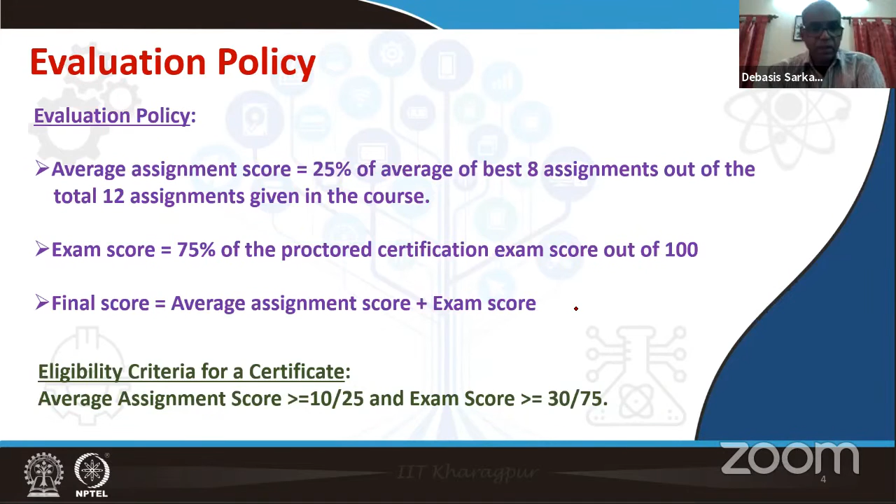Now, let's briefly talk about the effect of recycle. We first talked about recycle when we discussed conceptual process synthesis in the context of design of the reactor and its recycle stream. Then we discussed separation systems, and how the reactor and recycle stream influence the design of the separation process. We have seen that one of the most important uses of the recycle stream is to suppress the production of undesirable byproducts. Minimizing the amount of toxic and dangerous undesirable components has become increasingly important with tighter pollution and safety standards. So the recycle stream is very important. All unreacted reactants will be recycled back to the reactor. This will add to your process economics.

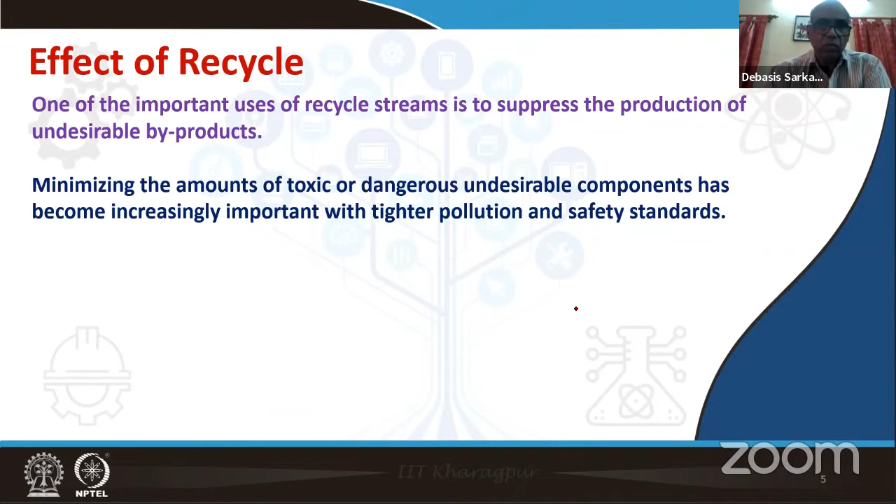Now, one of the basic issues with recycle streams is that they can produce a drastic slowdown in the dynamic response of the entire integrated plant. What it means is that a process without a recycle stream and a process with a recycle stream will show completely different dynamic responses. A process with a recycle stream will be much slower in dynamic response.

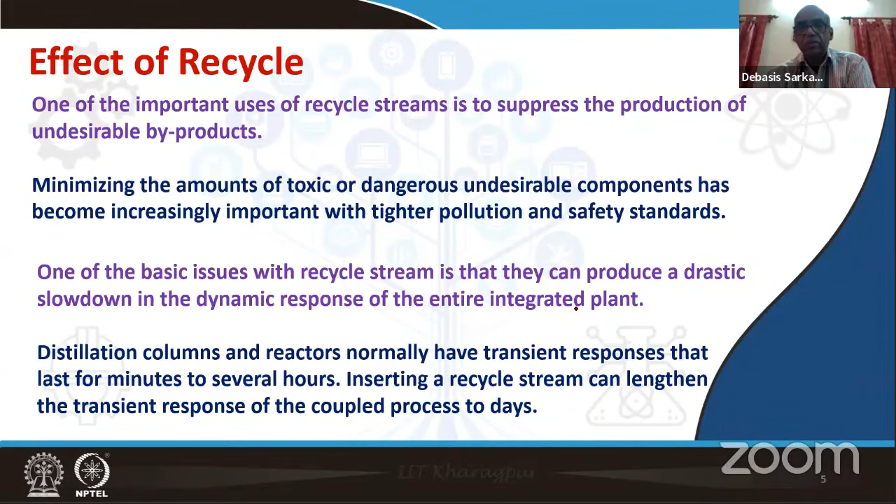For example, distillation columns and reactors normally have a transient response that may be of the order of tens of minutes to a few hours. But when you insert a recycle stream, the transient response of the coupled process may be in terms of days. So this is how it slows down the process dynamics. The response becomes very, very sluggish. Now, let us see why this happens.

Let's consider a very general process block diagram. You are familiar with this block diagram; you have learned it in your process control class. So we have a forward process, and then there is a recycle stream. The input to the forward process is basically the sum of the input that goes here as U and the input that comes from the recycle process. That's basically the output of the recycle process.

Now, what we can do is, we can consider the dynamics of this forward process. We can also consider the dynamics of the recycle process, and then find out the dynamics of this integrated process. So this is the simplest possible case.

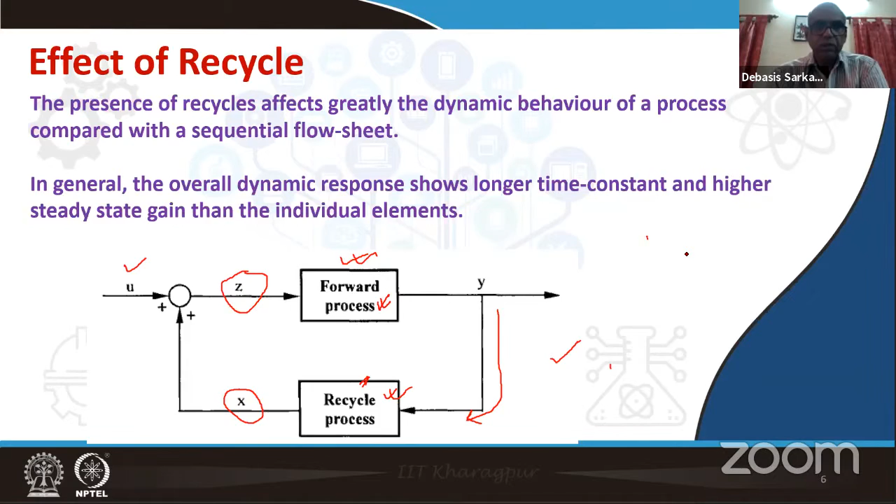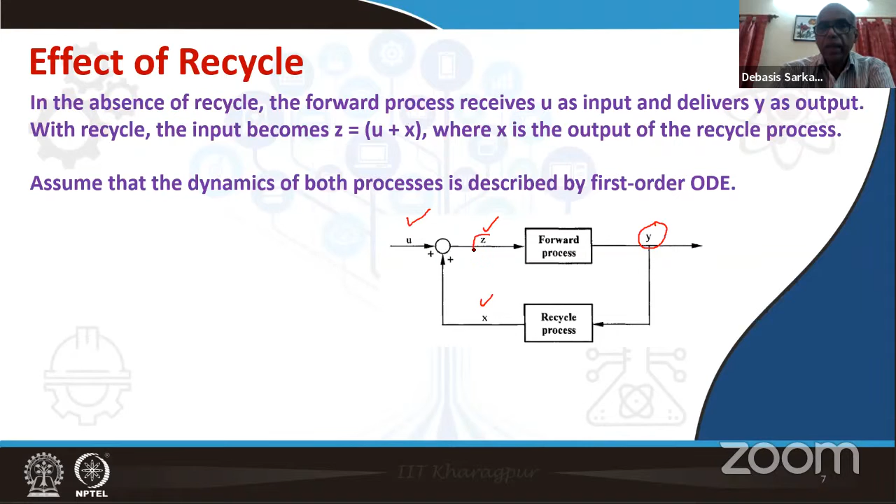So as we discussed, in the absence of recycle, the forward process receives U as input. But when recycle is on, the input to the forward process Z is the sum of U and X, where X is the output of the recycle process. Look, the input to the recycle process is Y, and output from the recycle process is X, which is added with U, and then X plus U, which is Z, becomes the input to the forward process. We consider that both the processes are first order processes.

Now let's recall your process control class. What do you mean by a first order process? A first order process can be characterized or mathematically expressed by a first order differential equation. So let's consider this first order ordinary differential equation. Here, y is the output or response of the process, and f of t is input. Note that both y and f are functions of time. The input may be step input, ramp input, sinusoidal input, and so forth.

Now what I have written, a1 dy/dt plus a0 y equal to b into f of t, is a very general representation of a first order ordinary differential equation. Now let's divide this equation throughout by the coefficient of y, which is a0. Please note that a1, a0, b are the system parameters.

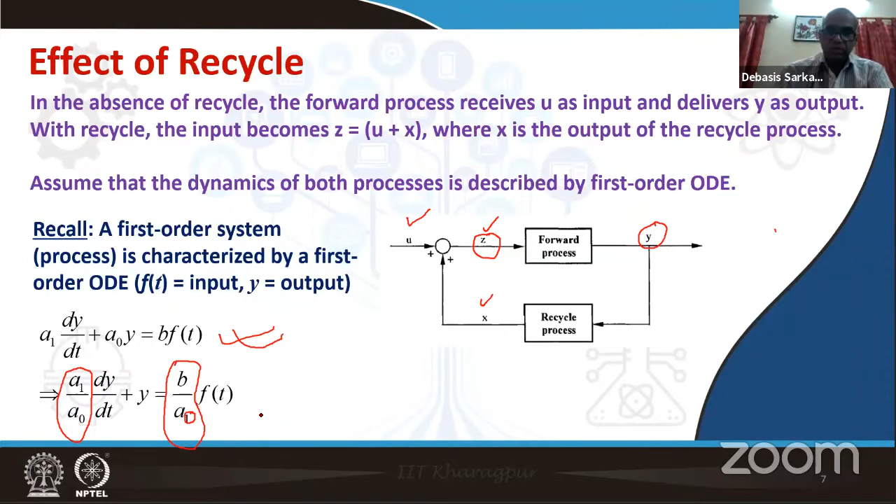So I have two processes here. One is the forward process, another is the recycle process. Both are being considered as first order processes, so I can write two first order differential equations. Let me first write down the first order differential equation for the forward process. Note that what we wrote in the previous slide was tau dy/dt plus y equal to k, the gain, into the input function. Note that the input function is z, equal to u plus x.

So this represents the first order differential equation of the forward process. Similarly, write the first order differential equation representing the recycle process. What is the input to the recycle process? Y.

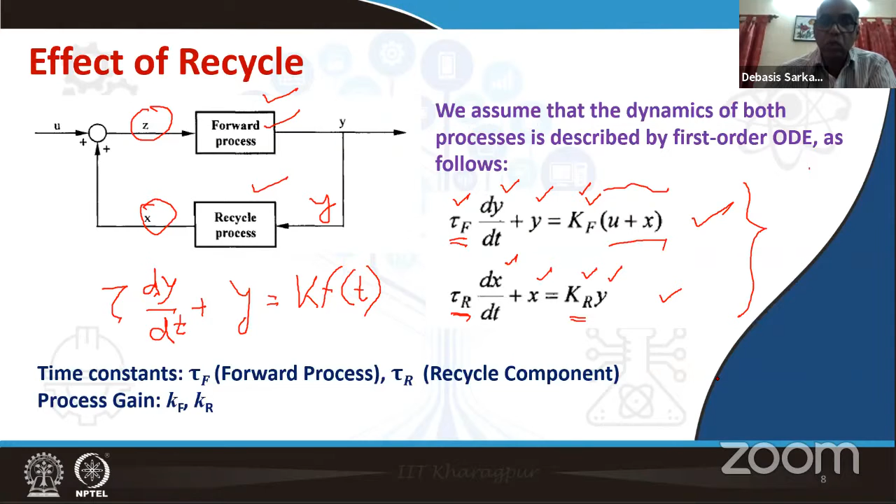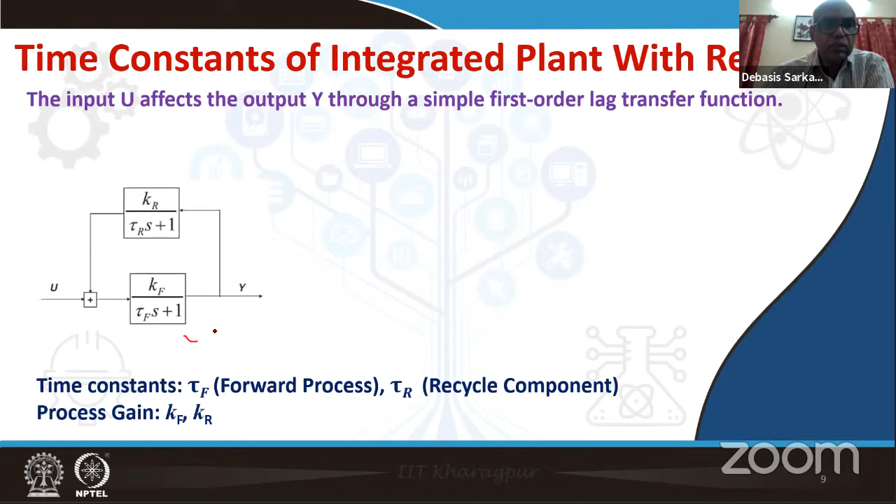Because finally you have to find out what is the response of this integrated process. So these two equations can be combined together to obtain the overall transfer function of the integrated process or overall behavior of the first order process. This basically can be represented like this. So forward transfer function and the recycle transfer function.

So what you can also do is you can take d/dt of this equation. So differentiate this equation, then you will have a dx/dt term. So that dx/dt term you replace using this equation. If you do that, you'll get a second order differential equation because you're taking the derivative d/dt of this. So d square y dt square you'll get. So you'll get a second order differential equation.

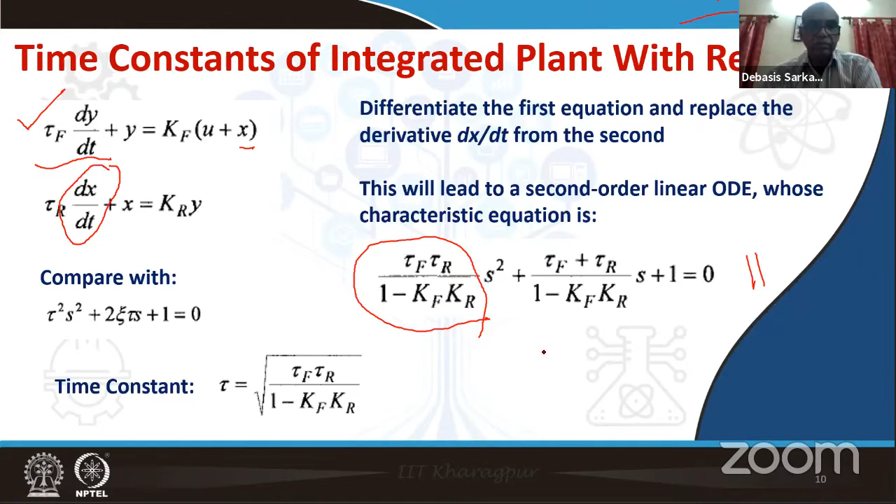So the overall second order system has a time constant that depends on the time constants of the individual components, tau f, forward process time constant, tau r, recycle process time constant, and the product of the two process gains, kf and kr. So now if you look at this equation,

the overall time constant of the process, that means the time constant of the integrated process, will become large when the KF KR value becomes closer and closer to 1. So when KF and KR value becomes close to 1, then the value of the time constant of the overall process increases. So here we plot several such situations. That means different values of KF into KR.

For that we set the time constant of the individual process at 1. That means tau F equal to 1, tau R equal to 1. So individual time constants have the values of 1 unit of time. And then for various cases of KF into KR, we plot response versus time. So we are setting this value to different values by considering tau F, tau R equal to 1, and then finding out the response for a given, say, step input.

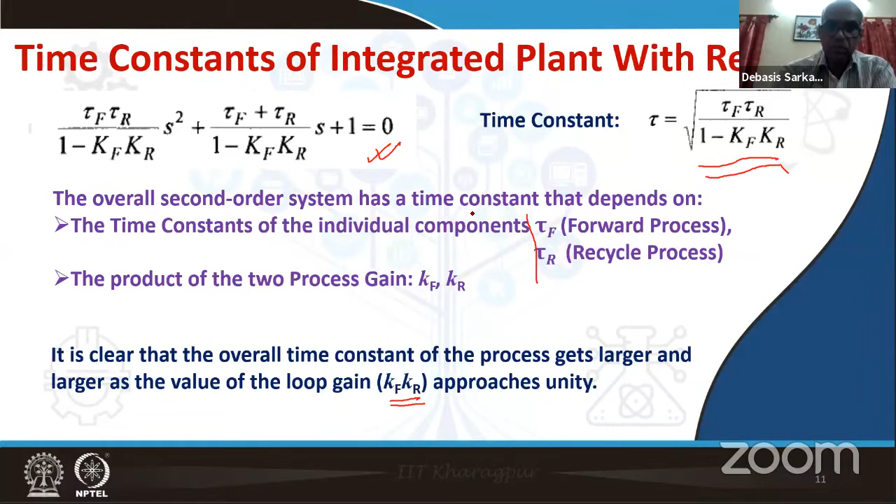So you have the transfer function. If we give step input for such situations, I can obtain the response. So these responses are plotted as Y versus T. Now you note the behavior of the response. We know that the time constant for a first order process is the time that it takes the output to get to 63.2% of the final steady state value.

That means, say, consider 6.32 here. So if we consider this case, KF into KR equal to 0.9, which is close to 1, note that the time constant becomes 20 units of time.

Remember, the time constant is that value of the time which corresponds to the 63.2% of the final steady state value. So consider this case where KF into KR equal to 0.9. So this value is 63.2%. So the corresponding time is 20 units.

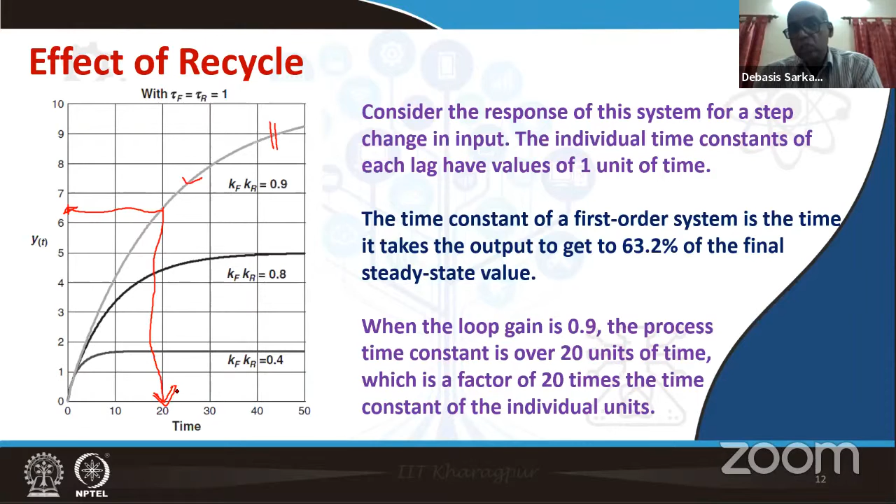So individual time constants are 1, but the integrated process time constant becomes 20 times. So this much the process is slowed down. So this is why presence of a recycle stream will drastically slow down the response of the overall process.

Now let's come to the snowball effect. See, the snowball effect, you just consider a snowball that is falling down the hill. So as it rolls down, its effect becomes stronger, more violent. So the snowball effect starts with a very small effect, but then goes on increasing its magnitude with time. The recycle has a similar effect.

The flow rates of recycle streams are often very sensitive to small disturbances. So a very small disturbance to a recycle stream can cause a very large change in the process. This is known as snowball effect. A small change in some variable, for example, fresh feed flow rate, can produce a very large change in the resulting flow rate of the recycle stream.

So consider a reactor where you have a fresh feed stream going in, and there's a recycle stream. Now, a small change in this fresh feed flow rate can cause a large change in the flow rate of the recycle stream. We'll briefly take an example and see.

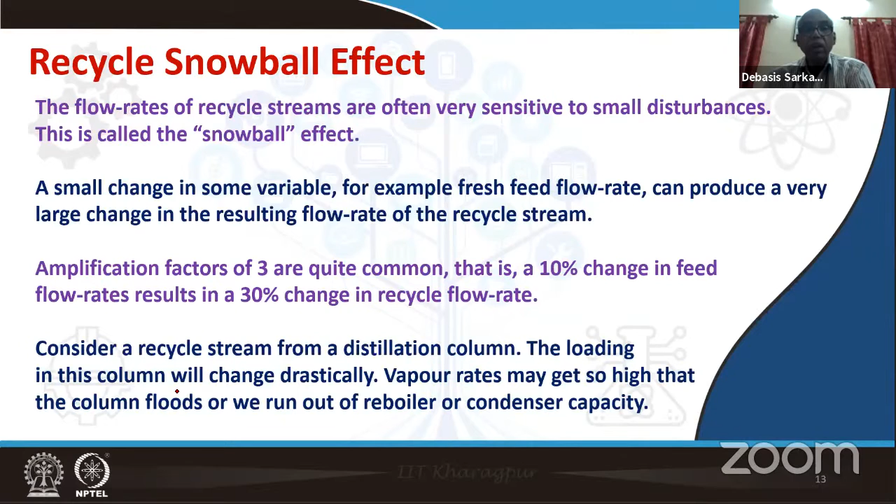Let me stress upon this point one more time. So if you consider a recycle stream from a distillation column, and there is such a huge change in the recycle flow rate, the loading in the column can change drastically. So the vapor rates may get so high that the column floods or we run out of reboiler or condenser capacity.

Snowballing occurs because the conditions in the reactor have to change to accommodate the disturbance. Say I increase the fresh feed rate by 10%. So what does it mean? It means that the reaction rates in the reactor must increase by 10%. If the volume and the temperature in the reactor are fixed, the only way a 10% increase in the reaction rate can be attained is by significant changes in the compositions of the reactants in the reactor.

So why are higher reactant concentrations needed? Because there has to be 10% increase in the reaction rates. So higher reactant concentrations are required. And how do I get higher reactant concentrations? By increasing the recycle of reactant. So that's how the recycle rate will increase.

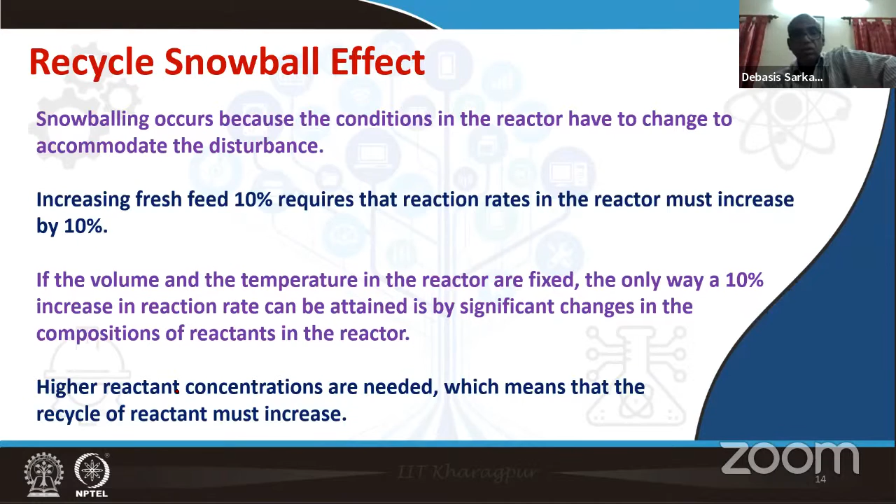So let's consider this example. This is an example of a reactor, let's say CSTR, where a reaction A to B takes place, which is a first order reaction. And if B is much more volatile than A, then the product stream, which will also contain unreacted A, can be separated by flash. So that is what is being done here.

So the effluent from the reactor is flashed and the product B is taken out as a vapor stream, and the unreacted A is being sent back to the reactor as recycle. So this is briefly what is happening in this flow sheet. The combined feed of pure A and recycle is partially converted to B in this reactor, which is R100, by the isothermal liquid phase irreversible reaction A to B. And this shows first order kinetics.

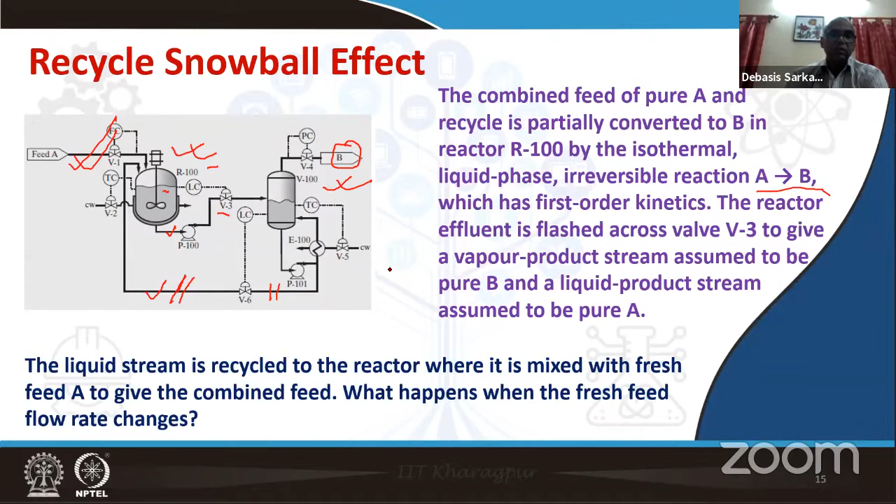So when the fresh feed flow rate changes, what happens to the process? What snowball effect will we see? This you can find out by doing the material balance equations. You write the mass balance equations on the inputs and outputs of this CSTR and the overall process, flash drum, etc. Also consider the first order reaction rate. But we are just presenting the data here.

Let's consider F0 is the molar flow rate of the feed and B is the molar flow rate of the flash liquid stream, that means the recycle stream. Note how the changes in F0 cause change in B. See, when F0, which represents the molar flow rate of the fresh feed, was 50, the molar flow rate of the flash liquid stream, that means the recycle stream, was 16.7.

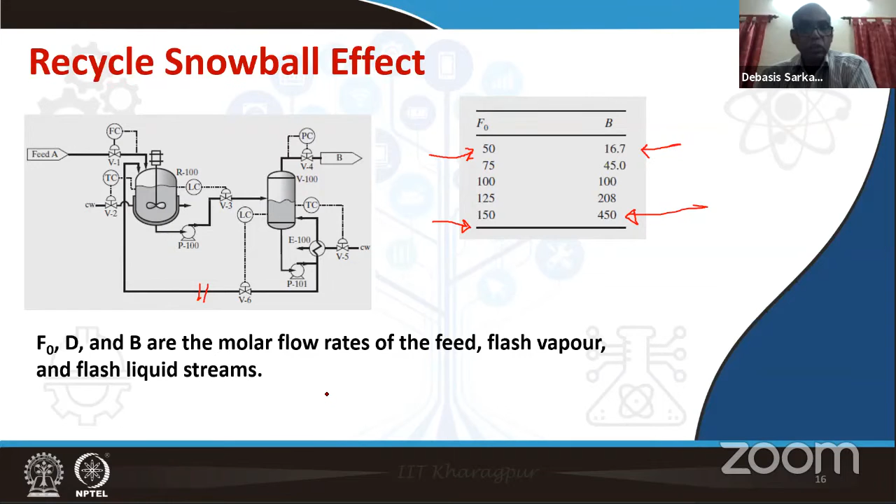So always remember the snowball effect of a recycle stream. The lesson we learned from here is that we must place appropriate flow control on the recycle stream. Otherwise, a small disturbance in the fresh feed stream for such a process can cause a great change in the recycle stream. So have a proper flow control installed on the recycle stream. Now, that's perhaps the time we get for discussion on the recycle effect and its snowball effect.

Now let's look at one question that came on the forum. How does degree of freedom influence a process plant like a petroleum refinery? Degree of freedom is a very important concept, and as engineers, we must know the degree of freedom of the process. Unless we know the degree of freedom properly, we cannot evaluate the process in terms of its controllability, how the process can be controlled. We had a brief discussion on degrees of freedom computation in our previous live session. It is important to identify what are the variables that are dependent, what are the variables that are independent, and then the relations that exist between variables. This information will allow us to compute the degrees of freedom.